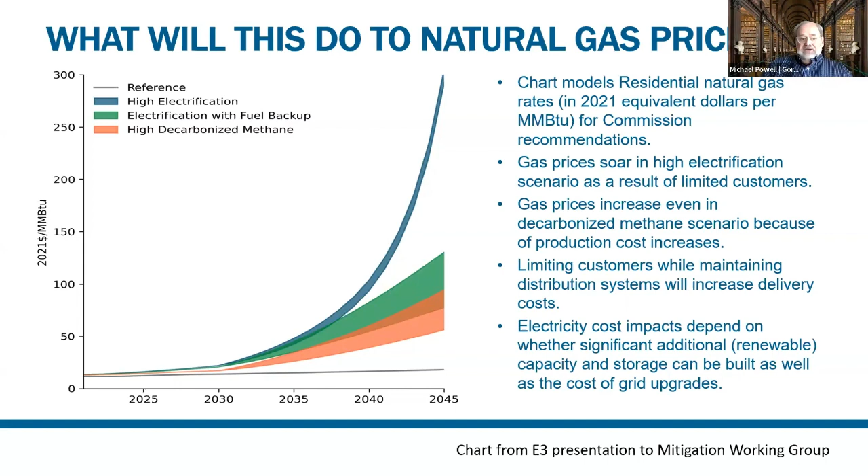And in fact, the state hired the University of Maryland to do something called a pathway report that said, how do we reach net zero? Not just how do we reach this 2031 standard, but how do we reach the standard for 2045? And the state is proposing in their early draft stages, early discussion stages, the additional measures that will be required to eliminate that other 49.

Let me describe some of those standards. Again, this gets a little more speculative. It's not in the draft regulations. It's what I see coming after the draft regulations. This gives you a concept of what is needed. This is from the pathway report prepared by the University of Maryland.

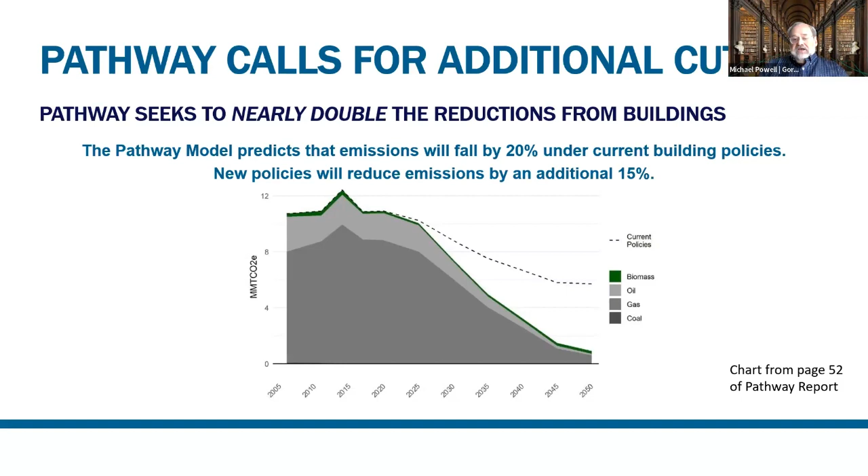What do I see coming next? The pathway report's got a number of proposals, and these are not even in draft yet, but they're proposals about what the state needs to do in order to get that additional 15%. The first thing coming up is something called clean heat standards. The building energy performance standards goes at it on a building by building basis and says, how do we cut emissions from this building, or how do we make these buildings more efficient?

The clean heat standards, which the Department of the Environment is working on, will approach it from an appliance standpoint. It'll be designed to force you to have more efficient appliances, or in most cases, force you to use electric appliances rather than natural gas, fuel oil, or propane appliances. So expect that coming from that line.

Secondly, the Public Service Commission is likely to adopt restrictions on new natural gas hookups. They may eventually look at something more comprehensive, but I think the first round will be making it very hard to hook up a building to natural gas. So if you've got a plot of land and you're looking at putting a building there, don't assume just because there's a natural gas pipeline out front that you'll be able to get a hookup.

Some of the local building codes are going even further, and they're simply banning all new hookups. We've seen that in some other states. There are about 20 cities across the country, most of them in California, that have banned new hookups. But it does look like something that's coming this way.

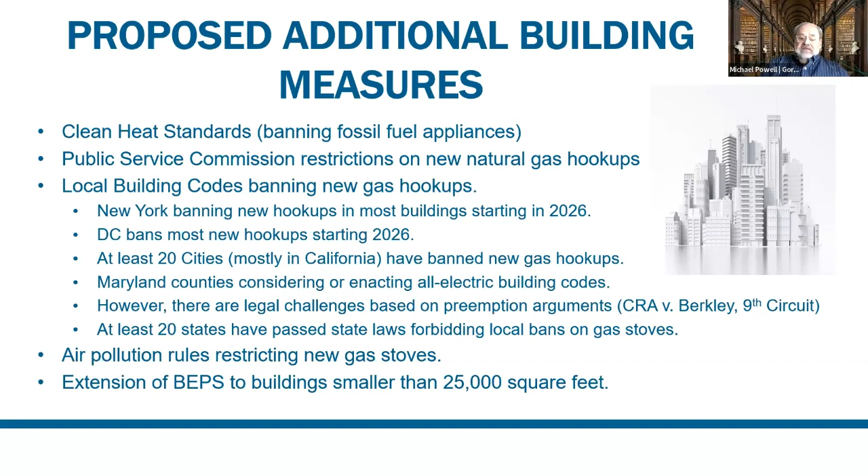There is already discussion within the Maryland Energy Administration and among the advocates to extend the building energy performance standards to buildings smaller than 25,000 square feet. As you'll hear shortly, currently the drafts only talk about larger buildings, but I think that that will be extended. There's also additional requirements coming that are non-building.

The one that is, I think, furthest out there, but nevertheless is a very serious proposal being discussed by the Department of the Environment and is in the pathway report, is something called a cap and invest, where it's basically just a carbon tax with a proviso that any taxes collected have to be spent on either reductions in CO2 or environmental justice. This sounds very radical.

The problem is that the pathway report by the University of Maryland says we cannot achieve the statutory standards unless this is adopted. That's what's giving this legs. It's also why I testified against the standards that are in the Climate Solutions Now Act. I thought they were too aggressive. But once you adopt those standards in the statute, you have to look at things like cap and invest, additional

renewable energy, right? To get to 100% clean electricity, you've got to greatly increase the amount of solar development in particular that we're doing in the state of Maryland. Because remember, the sun doesn't always shine. So you've got to have a lot of solar farms in order to generate the amount of electricity that you have to store for those peak periods.

Maryland currently is what is known as a summer peak. We use the most electricity during a hot summer afternoon and everybody turns on their air conditioners. Once you go over to an entirely clean system where you are using heat pumps and not fossil fuel to heat buildings, we become a winter peak state. Biggest demand is in the middle of a very cold February night when, of course, there is no sunlight. So that's going to be a massive shift alone.

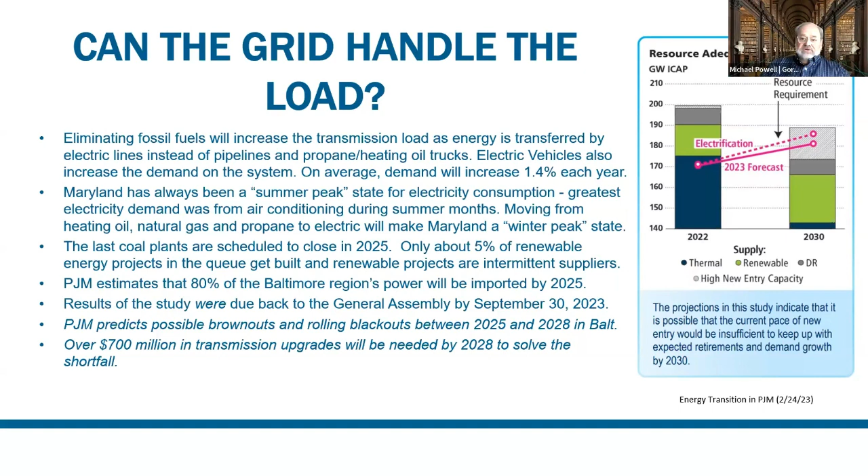They think by 2028, maybe we can build enough transmission lines to bring in enough extra power from outside the state to meet that requirement. Maybe if we can raise $700 million from ratepayers to pay for the additional transmission. So expect this to be a tough transition. And again, this is only the first wave of things that I expect.

That's in a nutshell the context. I'm going to let Chris and Dave talk to you about exactly what the building energy performance standards come from or provide, but this gives you a sense of where they come from.

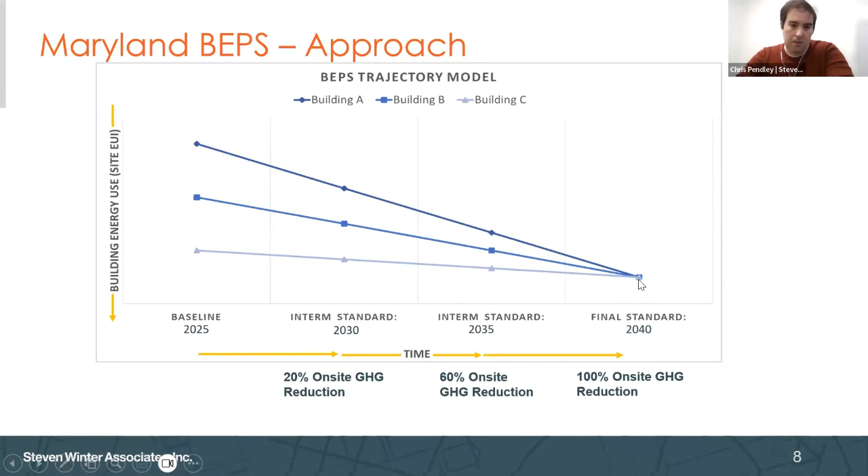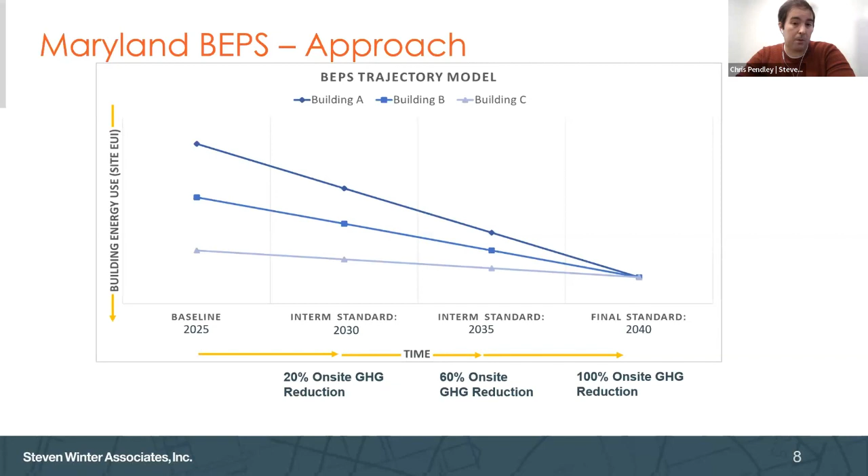So, lesson 2. If we're putting in new gas-fired equipment or new fossil fuel equipment in the next couple of years, we may have to pull that equipment out before the end of its useful life. So I would think very strongly about putting in new fossil fuel equipment, even today, given this 2040 standard.

And so let's overlay our benchmarking requirements now with what we know about Maryland BEPS. We have these different targets. We have this 5-year third-party verification effort that happens. We have these on-site greenhouse gas reduction items that we had on the previous slide. And the other piece is what we call a straight line trajectory between our baseline site EUI and our final site EUI. We draw those lines at 1/3 and 2/3 of the way.

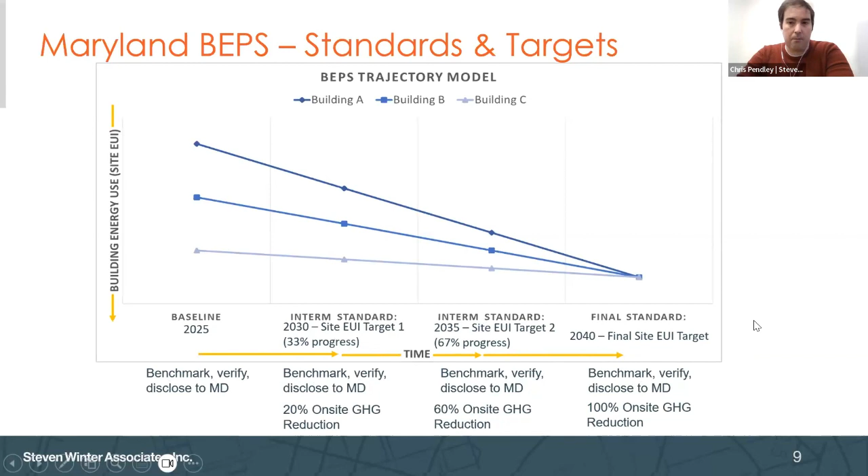Now, again, we do have some exemptions today. Commercial cooking is probably the exemption that a fair amount of y'all deal with. There's also a bunch of building types that are currently exempted, including industrial, schools, and again, big commercial kitchens. And then the other big one is going to be buildings under 35,000 square feet.

So at a very basic level, how do we connect this benchmarking requirement to this building energy performance standard? Well, first off, we verify our 2025 energy data. We weight our EUI targets based on space types, and then you get your building-specific trajectory from it. That's kind of an obtuse thing to get your head around, so we're going to give you an example.

Our example is going to be a very basic 100,000 square foot building with a site EUI of 100 kBtu per square foot and a greenhouse gas emissions intensity of 1 kilogram of CO2 per square foot. This is just an illustrative example to help us figure out what our standards look like and what sorts of things we have to do. So this is our mystery building, but depending on what's in the building, the work we might have to do varies quite a bit.

For example, if it's a multifamily property, just to pick one at random, we're right on that 20%, 60%, 100% reduction trajectory in terms of CO2, and so we can tie that directly to our emissions reductions. But now we have very aggressive site EUI targets given that. If the building was a 100,000 square foot medical office building, all of a sudden we have a whole lot of stuff we need to do with gas, but we don't have as much to do with site EUI.

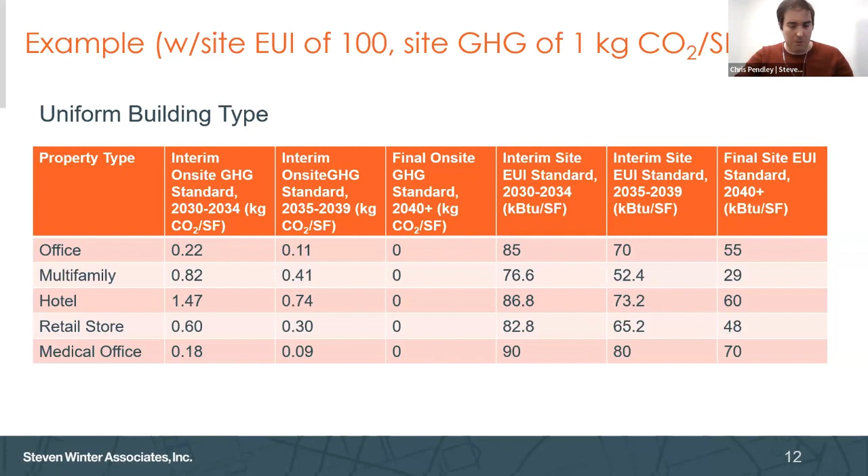But to go back to our site example, this is assuming that all of our building is the same space type. What if we have multiple space types in our building? Let's say, for example, we take this building and now it's half office and half multifamily. So what you do in this scenario as you're trying to figure out your building targets is you weight your targets based on the percentage of floor area of your various space types. So we made our lives easy. We said the building's half office, half multifamily. So we basically find the midpoint between these two items.

And so our actual target and trajectory for our 50% office, 50% multifamily building looks like this bolded line down here. So what does that tell us? This tells us that we have a lot of work to do over the next 15 years. And you could have more than 2 space types. You could have 6 or 7 space types. We just did 2 space types to make the example a little bit easier to follow. So that's a lot, right? What if I don't do anything? What does that look like?

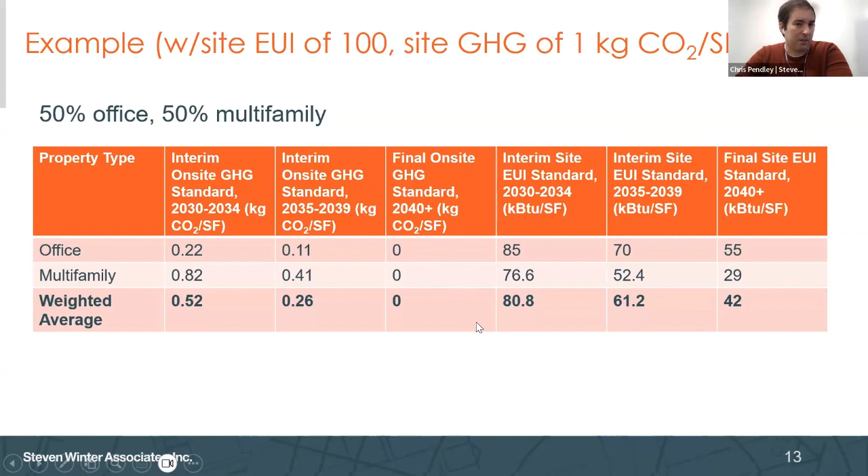So there are penalties, or I think they're called alternative compliance payments. And these compliance payments are twofold. There are greenhouse gas penalties that are based on the social cost of carbon. They're per metric ton of CO2 emitted. They are annual payments, and they start at $230 per metric ton of CO2, and they increase by at least $4 a year. And that starts in 2030. And that's the greenhouse gas component. The other component, which is probably the one that got your attention, is the site EUI penalty based on existing air quality civil penalties. And that can be up to $25,000 a day.

Now, with that being said, we do not know how this is actually going to be enforced. For example, in Washington, D.C., the performance pathway, which is a site EUI reduction pathway, has a fine of $10 a square foot if you do nothing on the pathway. But that fine is reduced based on your progress towards the targets. So there are various scenarios where I could see MDE considering doing something like that. That sort of thing kind of makes sense.

We don't know if it's going to be a daily levied penalty, but I do want to make you aware that there are 2 different approaches here: there's the greenhouse gas payment piece, and then there's the site EUI piece. So there are potentials for 2 different alternative compliance payments in this scenario. Yeah, so that's kind of BEPS, right?

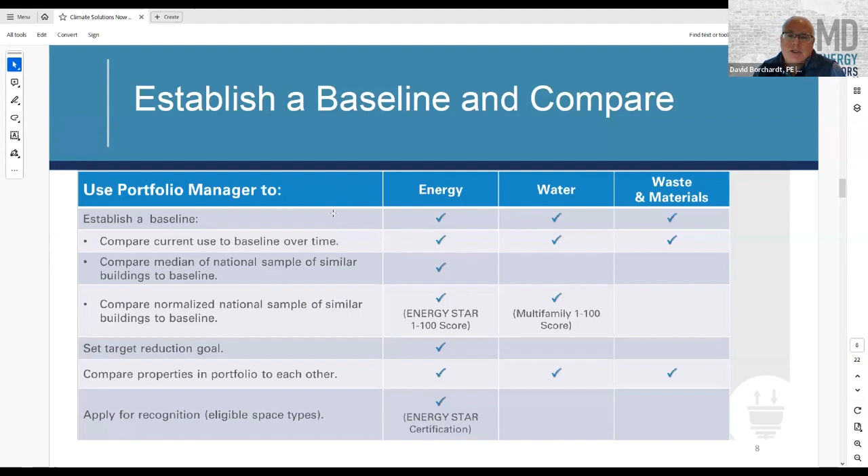I'm assuming some people on the call are from national companies who probably benchmark already and know where their buildings stand, or even if they don't, they should know where their buildings stand, and you can compare a building in Florida to a building in Chicago. It allows you to do that.

So what information do I need to provide? Property name and address, the total gross floor area of the property, the irrigated area, the year built, all these things. There is a whole list of data. So where do I get this list of data? Portfolio Manager has a site on where to get started, and you start with the country. A lot of countries actually use Portfolio Manager. Then property type, and you can add subtypes to it, and it will give you a printout of a list of questions.

This is just the first page of 6 pages for a typical office building. But it will give you what pages you need, what data you need, and how to collect that data. There are ways to put it in spreadsheets, which is something we do, to do a bulk upload. So even though everybody talks about energy use, it's not just energy use. There's a lot of other data that goes in there to make sure you have accurate numbers.

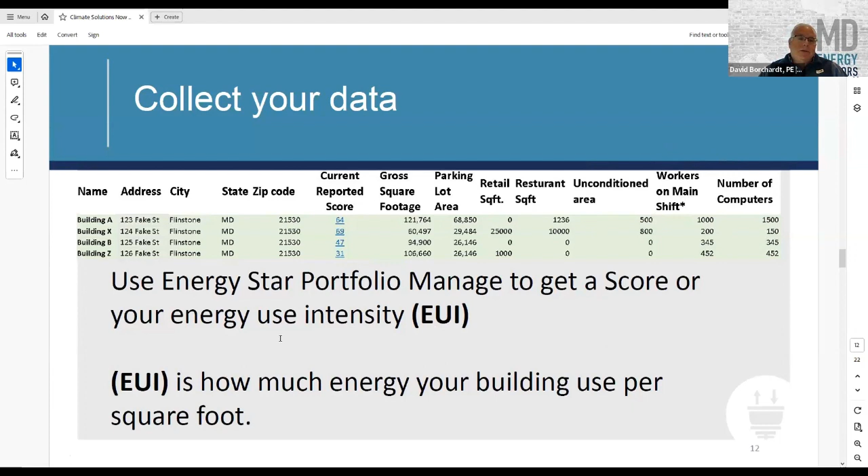So you collect your data, and you have everything in there, even if there's a restaurant, unconditioned area, workers, number of computers, and you get your score and you also get your energy use intensity. EUI, which we've all talked about a little bit, is how much energy your building uses per square foot. Energy use intensity. It's measured in BTUs. It's a measure, just something to be aware of. So then you get your results.

It just shows the difference in how you operate your buildings can make a huge difference in your score. So this is an advantage of Energy Star. And when this developer found this out, they realized they had an issue that they were not actually aware of.

Because of the building size differences, the bills weren't as far apart as they would have expected. Score-wise they were, but cost-wise they were not. So it was kind of interesting to see where you are with this. So don't be surprised if you have similar buildings that you think are operating similarly that are not. And this is just by improving your operations.

So we've also talked a lot about site EUI versus source EUI, so I wanted to give a quick graphic so people understand that. Your site EUI is the energy you use on your site, the net greenhouse gas carbon emissions of your building, regardless of whether the power plant providing your building, or power plants in PJM, which is our regional utility supplier, is gas fired or coal fired. Whatever percentage that is does not matter. It's your building energy use.

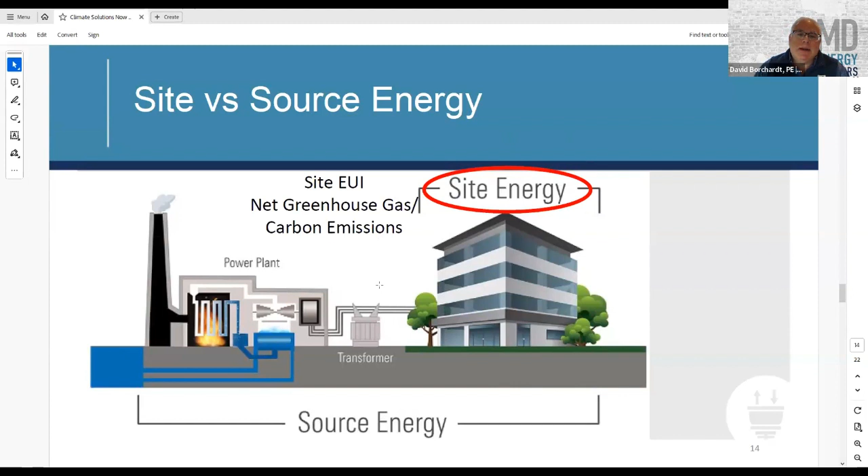It doesn't necessarily mean if you have a fully electrified building today, you're in good shape. But it does mean that you need to pay attention to what you're doing at your building. And there are some conversations going on now: if a site has solar, does that help offset some of the EUI? And there are some questions about how that works and whether it will benefit or not benefit a building.

So I benchmark, what are my next steps? As Chris said, and I'm recommending, check your data for errors, changes, and inaccuracies. A lot of people put in the square footage of an office building or a multifamily, and they're just looking at the rentable square footage, not necessarily the gross. Regularly update your data. Hopefully somebody's going to start holding the utilities responsible for updating the data and getting it uploaded accurately, but you need to check that utility data to make sure it's accurate.

And then share your facility with the state benchmarking authority when it's required. There's a link on Portfolio Manager that allows you to do that. That's probably the easiest part of this whole process. So what do you do once you have this information? Well, there are a lot of no-cost tools for efficiency that are available.

So you can develop new lease standards for efficiency. If you have tenant interiors or you have multifamily, when you do turnover, there are things you can do in the units. There are things utilities will support you with to help you make your building more efficient. Build it into the rules, but work with tenants on energy data. A lot of industrial owners work with their industrial tenants, not just to reduce their energy use, but to make the buildings more efficient, to help them understand what they can do. Educate your tenants and offer resources. Understand what you can do within your budget.

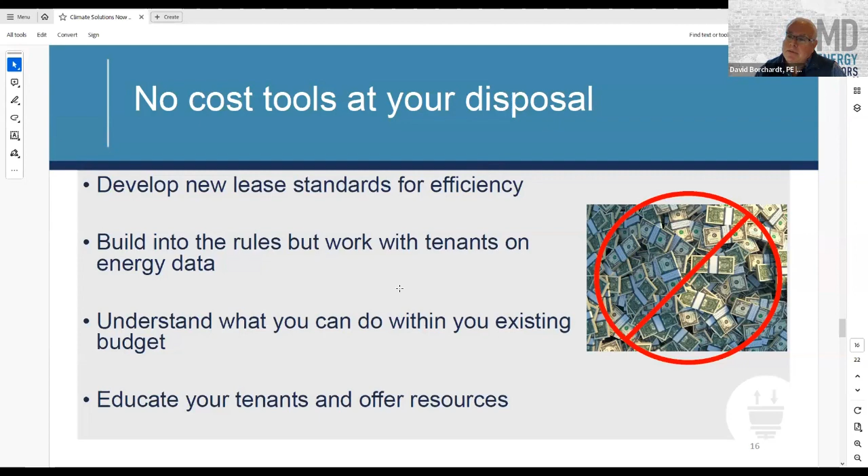You have building maintenance costs built in. There's a lot you can do to replace equipment. We've all been in buildings that have a lot of fluorescent lights and they have cases and cases of them. And somebody decided we're not going to change to LEDs until we get rid of all these fluorescents. Well, that's probably not the way to go nowadays. So this gives you an idea, but it's not just that. You can take a poor performing building, as we saw in that earlier number, and make it a high performing building with operational improvements using your existing budgets.

So why would I do this? Why would I pay attention to this? Well, you don't want to waste money. You can use this as part of your capital planning. You can use it as part of your budgets. This is going to start impacting your building value. People are going to start asking about this. Banks are going to start asking about it. People who are buying buildings or looking at buildings are going to want to know how they're performing.

You can compare your own properties, and you can use this as an incentive or to help your building engineers understand where they are today and ways they can improve. In fact, it can even become a friendly competition between the building engineers. It can help with leasing in some cases, ESG reporting, and investor and tenant data requests.

I have had tenant data requests way back in the mid 2000s from European companies; they wanted to know what the carbon footprint of my building was. They needed to know that information, so we had to provide that. So it was a way to keep a tenant satisfied, and it was also a way to meet that requirement.

We also have owners today we're working with who have investor data requests. They want to know what their carbon footprint is, even though it's not something they're tracking yet, but it's something we can provide. So it's something that is becoming more and more important. If the SEC regulations ever come to fruition on carbon footprint, this is something else that's going to become more and more important.

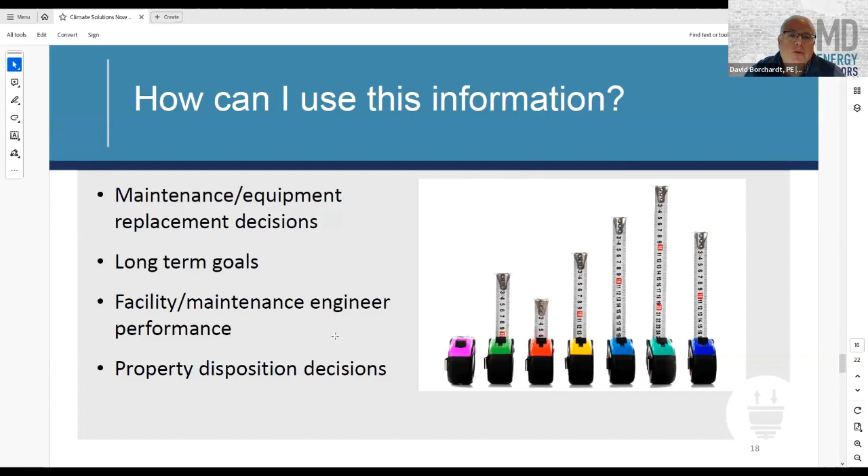So how do I use this information? As we said, maintenance and equipment decisions, your long-term goals, facility maintenance engineer performance, but also property disposition decisions. Do you want to buy a property that's poor performing and see if you can improve it? Do you want to dispose of a property that's poor performing? Or will you only buy properties that are well performing? It gives you that information you need to help make wise decisions.

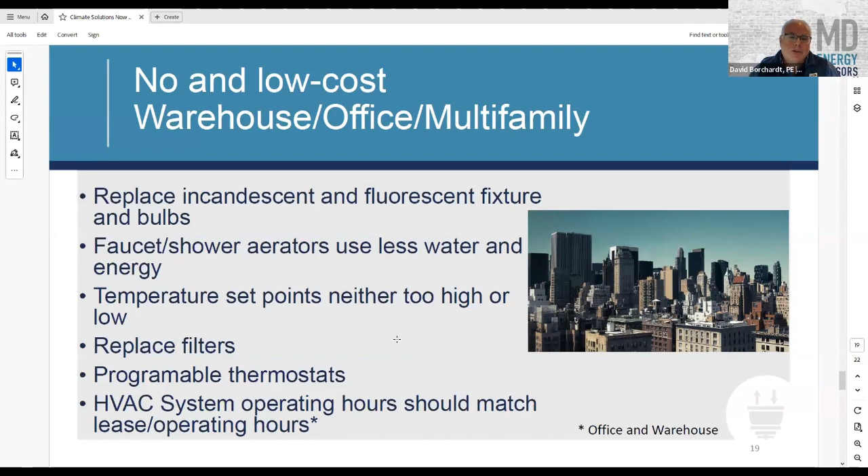So what do I do today? Don't panic. First thing I tell everybody, start now, allow for long-term planning now, start saving operational costs. This will increase your NOI, and you can drive the new regulations. Again, comment once those regulations come out.

And finally, there are a lot of free outside resources. The DOE Better Buildings Solution Center: if you're looking to do something in a building, there's probably someone who's done something similar. And to put something in the Solution Center, they actually have to put what they did, be it a spreadsheet or lease language or an actual calculation, it is in there. And you can look for it and hopefully find what you're looking for. The database on state incentives, we can help you with that. And the Institute for Market Transformation, who helps promulgate a lot of these resources, also is a good resource for looking for these things.